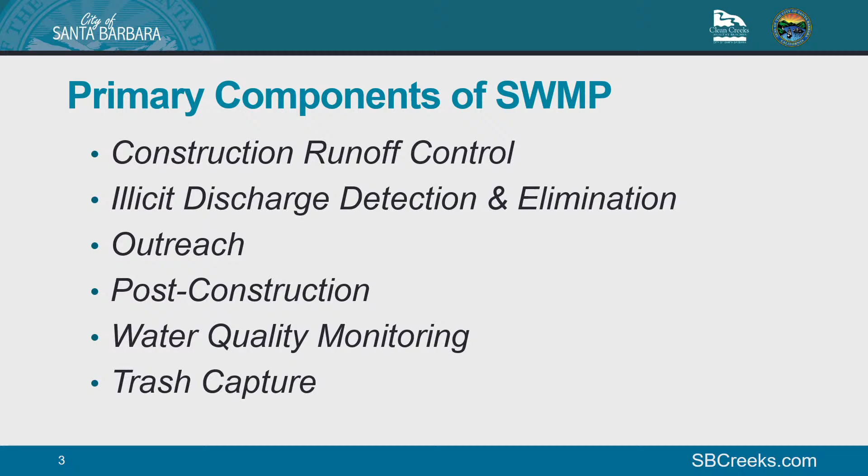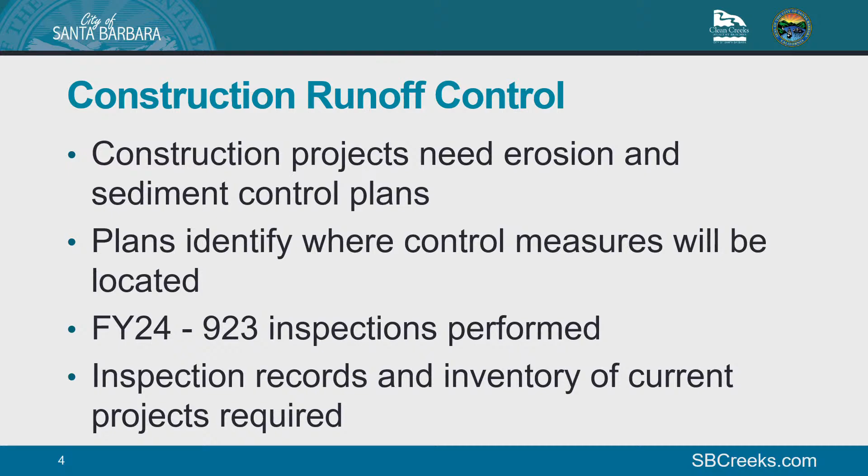First, construction runoff control. That's primarily the purview of the city's Building and Safety Division. It involves construction projects needing erosion and sediment control plans before they can have an issued building permit. Depending on how much grading is proposed, you might need a simple plan or a more extensive plan, but these plans just identify where erosion and sediment controls will be installed on site. Last fiscal year, our building inspectors went to 923 different sites to perform inspections to make sure these measures were installed properly. The city's also required to keep inspection records and a running inventory of all construction projects that have these erosion and sediment control plans.

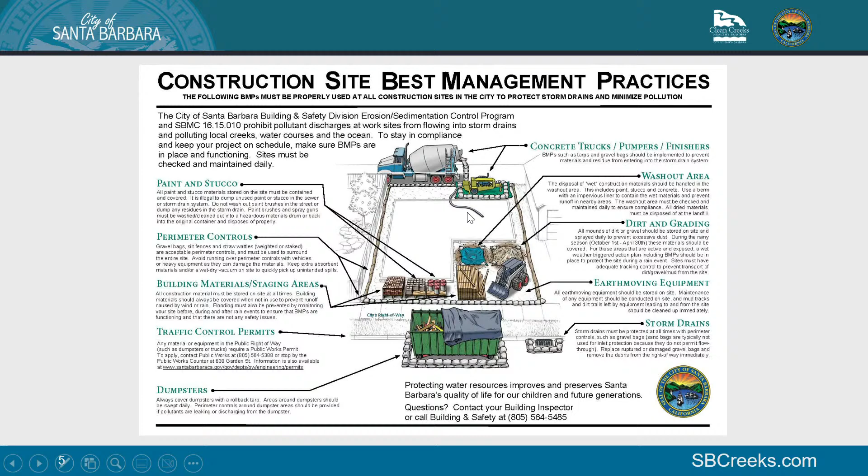The next component of our program is illicit discharge detection and elimination. The city has 3 dedicated code enforcement officers available to respond to any illicit discharge reports that come in. The requirement is that once we receive one of these reports, we respond within 24 business hours.

Staff also train the city field staff each year to make sure they know what an illicit discharge is and how to prevent that in the course of what they do out in the field. Last fiscal year, we had 105 illicit discharge reports, and all of those were responded to within 24 business hours.

We also have the ability to remove trash from the city's creeks and beaches. So there's illicit discharges, but there's also cleaning up these illicit discharges. When staff find trash on the creek or on the beach, we have a contractor that can come out immediately and clean up whatever they find. Last fiscal year, and in most years, we clean up around 100,000 pounds of trash. That's just on average what we find.

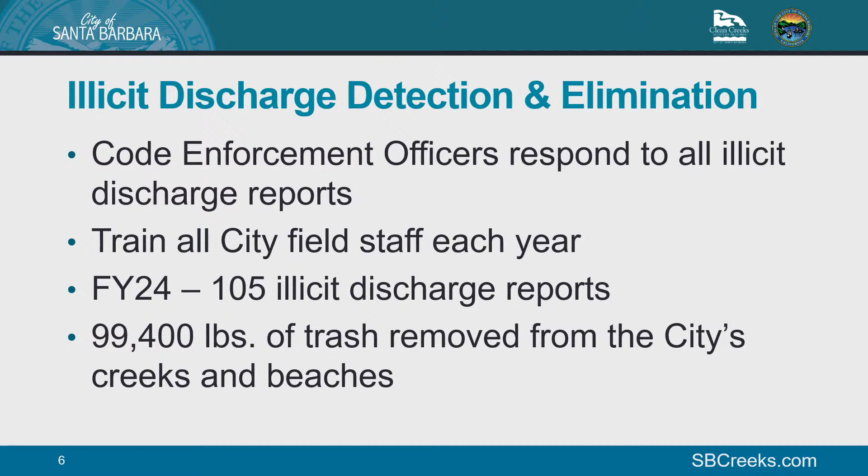The next component of our program is outreach. We have several dedicated outreach coordinators within our department that implement education and outreach related to improving creek and ocean water quality. This includes giving presentations in schools, coordinating volunteer opportunities like beach and creek cleanups. It also includes hosting Creek Week events every year that include restoration site tours and events at the creek, including the very popular Land Shark tour every year. If you haven't gone on that, I encourage you all to give that a try.

We're also continuing to promote the TikTok-inspired 'We're All the Solution to Water Pollution.' They're continuing to run ads, I see them pretty frequently, and when I hear the song, it gets stuck in my head.

So there's a couple new items that our outreach folks are focusing on. We have promotion of the new stormwater rebate program, which Aaron Markey is going to talk about next. We also have an urban creek trails program that launched during Creek Week last year.

This is just a self-guided tour of Lower Mission Creek and the lagoon, where you can go online and check it out, even from your phone, and it'll have things of interest, like native plants and trees, several spots where you can see how stormwater is captured and treated with permeable pavement and downspouts directed to landscaping, and also some creek restoration.

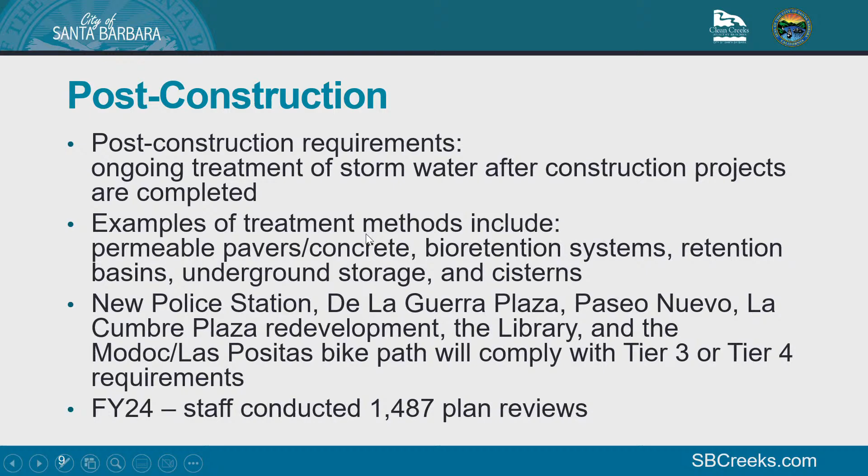Last fiscal year, Creeks Division staff performed 1,487 different plan reviews for compliance with post-construction. Next, I just wanted to give some examples of how applicants are complying with post-construction requirements. We'll run through a few of these.

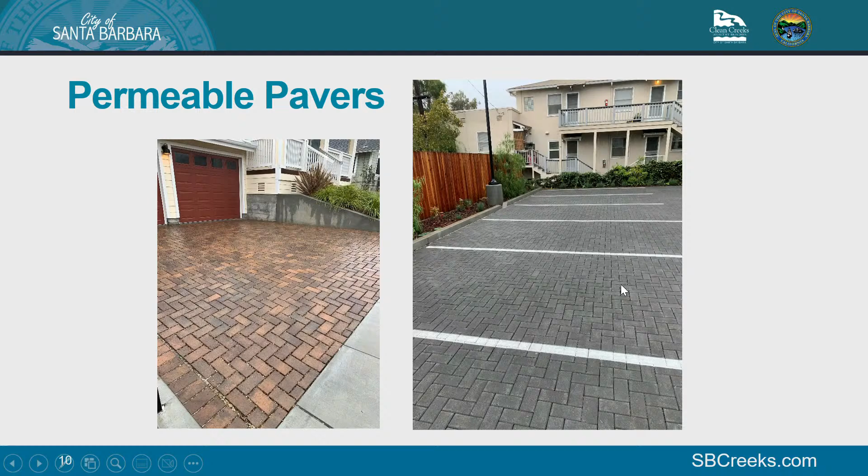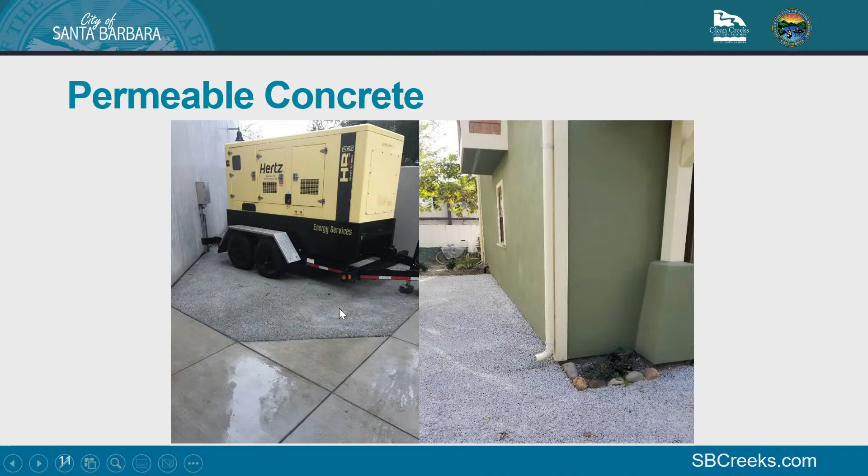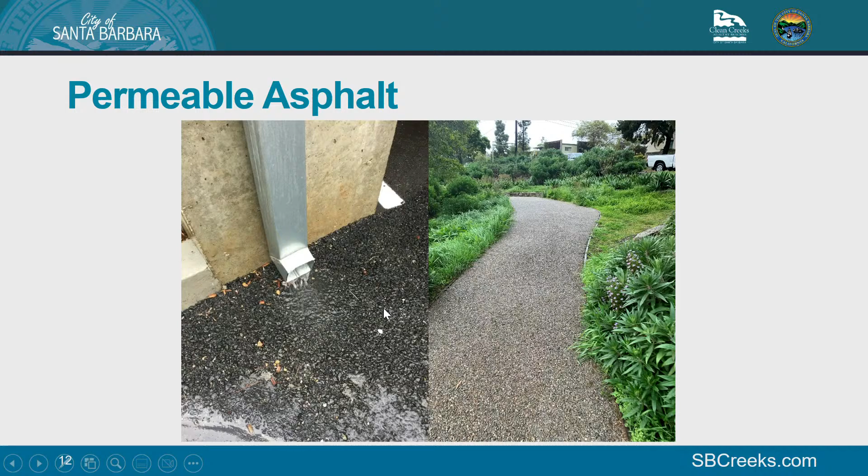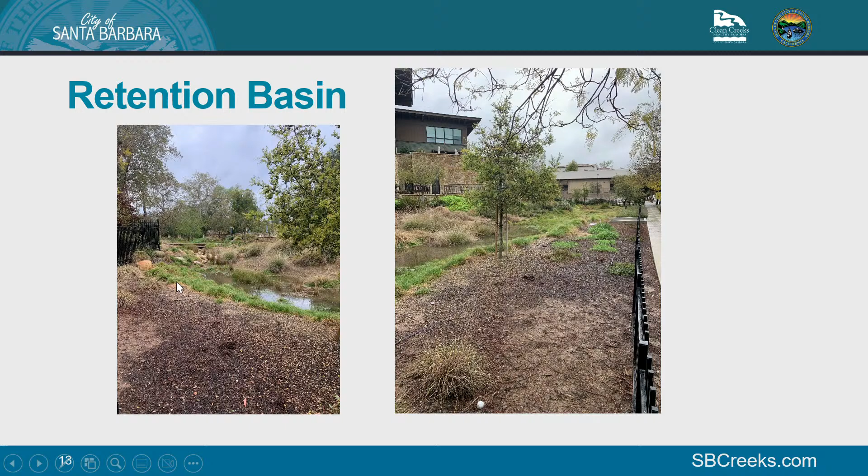Retention basins are another great method of compliance. We don't see a lot of this because, as you can see, it takes quite a bit of space, and most people, when they want to develop their parcel, want to use that space for development and don't want to dedicate it to a pond or retention basin. But occasionally we do see these in town, and they're cost effective - great for habitat, and very cost effective.

Bioretention planters are something we see with a very built out environment. Kind of the downside is you don't get a lot of capacity. The roof runoff flows into the bioretention planter, then there's a ponding area, and it percolates down through the media layers - the soil and the gravel - and then down into the ground.

Underground storage chambers - we see a ton of these. This is one of the most common things we see, because of how flexible these installations can be. This is Bohnett Park, an installation the city did a few years ago, and then they installed a field over the top of it. These are basically buried hollow chambers with a pipe connected, so water can flow in underground, then they fill gravel all around it, and you can cover it over with whatever surface you like. We did grass at Bohnett Park, but they're very popular with built-out parcels or where you want to build lot line to lot line. I've even seen these proposed under a building or under a parking garage.

There is a concern with maintenance - out of sight, out of mind. So we do require that there is some method of accessing these chambers to vactor out and suction out the sediment.

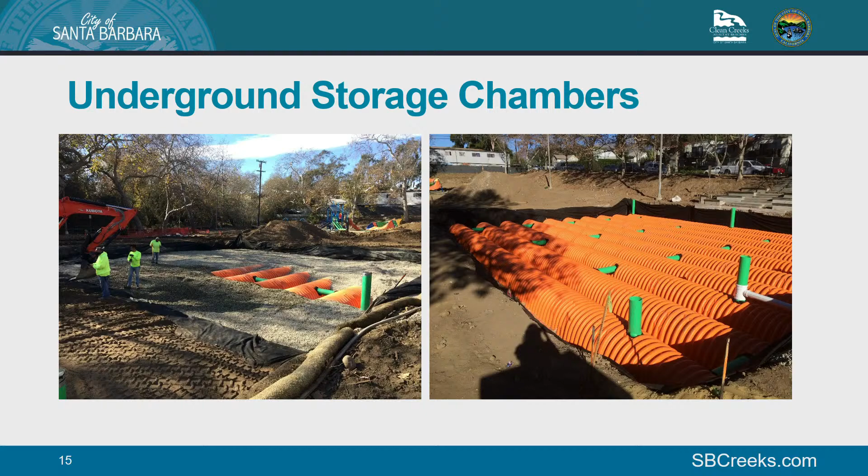Cisterns are another very popular method of compliance, especially on sites with soils that don't infiltrate very well, or on a steep hillside, or just where the property owner wants to utilize the water instead of infiltrating it deep underground - they want to spread it around their lawn or irrigate their plants with it.

The next component we'll talk about is water quality monitoring. We have a dedicated water quality monitoring coordinator, or we will, I should say - we're interviewing for that position tomorrow. This was Jill Murray's former position, but we'll be rehiring for this.

Each year, the water quality monitoring coordinator prepares a research and monitoring plan, which includes things like dry weather sampling of outfalls. All the pipes into the creek should not be flowing during dry weather, unless there's some type of groundwater intrusion. We want to make sure there's no illicit discharges happening, so it's a great time to sample when it's 72 hours after it rains at least. We can take a look at these outfalls, and if we find anything flowing, we can try to figure out where it's coming from.

We're also looking at monitoring of impaired water bodies for bacteria and toxicity. Most of the creeks in town are considered impaired by the water board, and the hope is that with repeated testing for bacteria and toxicity, we can eventually demonstrate that they should not be listed as impaired water bodies anymore.

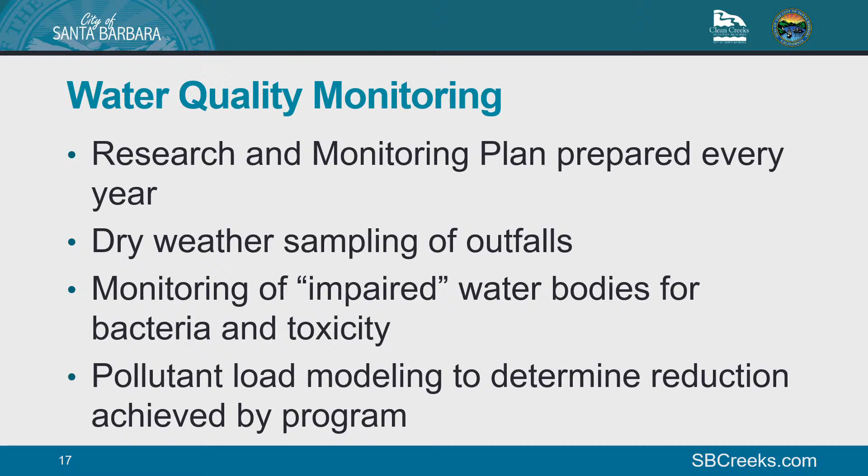Each year, we're also focused on pollutant load modeling to determine the reduction that our program has achieved so far. That's looking at some of the stormwater improvements we just talked about, to see that once more of those are installed on site, we'll have less pollutants coming off of those sites, and over time, as more parcels get redeveloped, there'll be less pollutants flowing off of those sites.

Here's just a few photos of staff out in the rain doing water sampling.

The last component of our program that we'll talk about is trash capture. It's a relatively new permit component. It actually hasn't officially been in our permit yet. We're waiting on a new permit to be issued, I'll talk more about that in a second. But we're required to fully implement these requirements by 2030.

What this is going to entail is in certain priority areas like bus stops, commercial areas, industrial areas, mixed use, and high density residential land use areas, we'll have to figure out a way to prevent trash 5 millimeters and greater from entering into our storm drain system and migrating downstream. That 5 millimeter diameter is about the diameter of a cigarette butt. That's kind of what they're targeting. Anything larger than the cigarette butt, they want to keep out of the storm drain.

So we currently have storm drain screens on most of our storm drains in town. However, those were installed 15 years ago or so, before this requirement, and those were not designed for a 5 millimeter, or cigarette butt, diameter. So those will not help us comply. So what are we going to do instead?

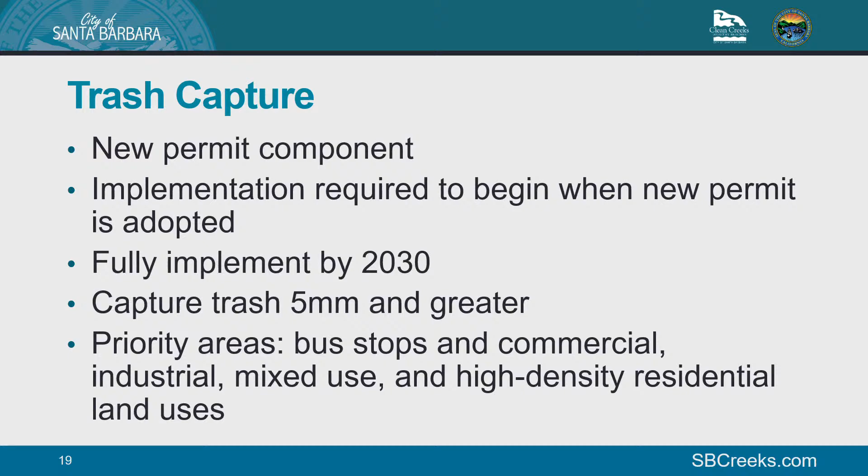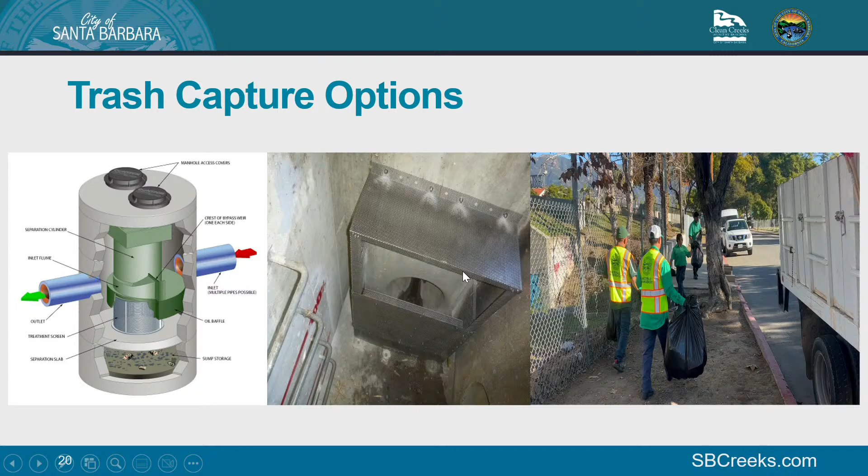But what we're hoping to do instead is to demonstrate that through street sweeping and through repeated trash cleanups with staff and contractors, we can reduce that amount of trash in high-trash areas to a negligible level, so we don't need to install these stormwater controls. That's our hope, and we're still working on that. Once we have a proposal, we'll go to the water board and try to convince them that our plan is okay instead of installing these structural measures.

So I mentioned our annual report. Each year we submit one of these to the state through their website. Creeks Division is responsible for compiling all the summaries we receive from city staff. I mentioned over 200 measurable goals that we report on. Each year in October we submit that report. Last October we submitted our report, this October we'll submit another. It's due on October 15th. We're currently in year 12 of the permit that was issued in 2013.

It seems like every year when I give this presentation, I say we're going to get a new permit any day now, or this year. We're in year 12 of what was supposed to be a 5-year permit, so we're still waiting. But we have received an initial draft of that new permit, last September. It was an informal draft. The next draft, the formal draft, is scheduled for this spring or summer, so we'll see if that happens. The latest estimate is for adoption of this new permit late this year, so late 2025. If that happens, then the beginning of our next fiscal year, fiscal year 2027, would be when the permit takes effect, so July 1st, 2026.

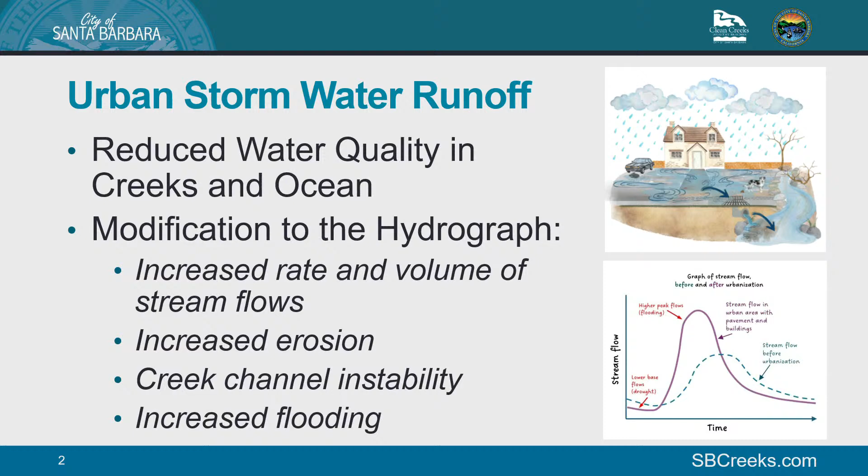Really trying to look at stormwater as a resource, and how do we manage stormwater as a resource instead? That's through, in our built environment, allowing things to infiltrate into the ground, providing more permeable surfaces—permeable hardscape, landscaping, green roofs—things that allow water to soak into the site, be retained, and slow that runoff curve, more mimicking the natural environment pre-development. This reduces flooding, reduces the erosional problems we're seeing in our creeks, and as water soaks through the soil, you get water treatment before it soaks into the groundwater and into the base flows of our creeks. You can also get increased base flow in our creeks as another benefit.

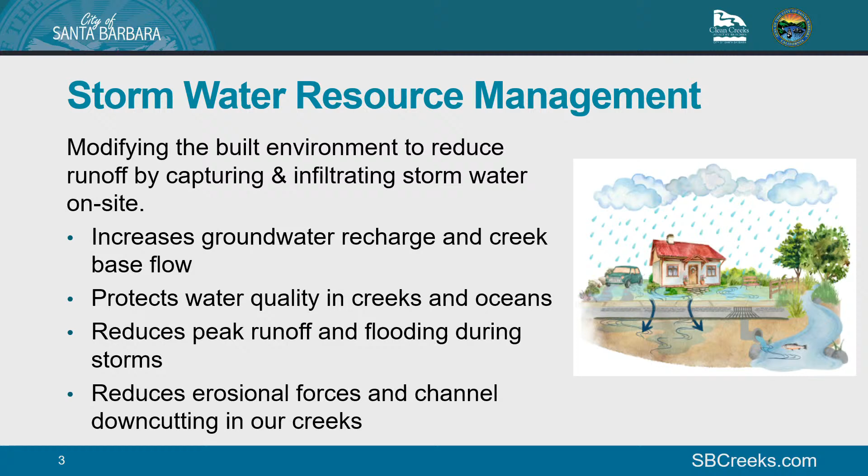So we've launched our stormwater rebate program just last week. We're looking at voluntary measures that property owners can install on their own properties to provide stormwater benefits. We've narrowed it down to these initial offerings at this point—kind of a pilot, launching it to see how much interest there is and how we might tweak it over time.

Disconnected downspouts essentially means if you have a downspout that's currently piped all the way to your curb and gutter—that's a piped downspout. If you disconnect that and let your roof downspout run to landscaping instead, you'd be eligible for a $250 rebate per project.

There's also a rain barrel rebate. Rain barrels are usually installed at a downspout and can range in size. We're limiting ours between 50 and 200 gallons—anything over that is really more of a cistern and might require structural stability analysis because of weight. You can get up to $200 per barrel, and this is on a reimbursable basis.

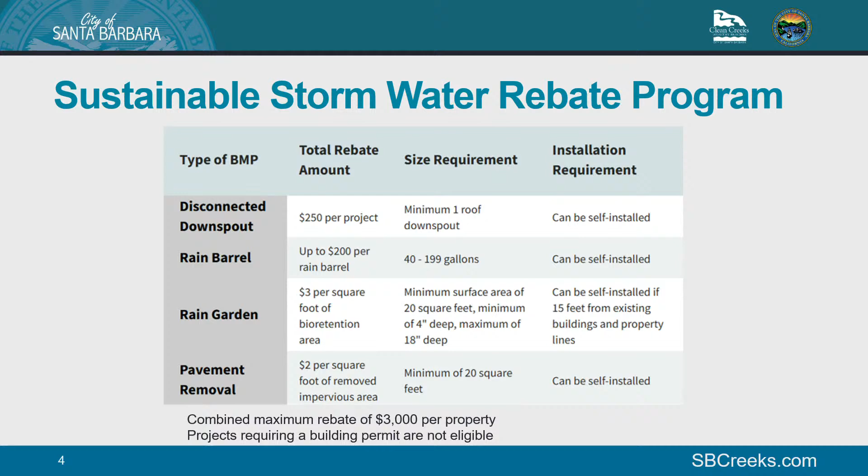I'm going to click through ahead. There's information in this table, which is on our website, and I've got pictures of each of these as well. Here are some examples of disconnected downspouts—you can do rain chains, or just cut off the downspout and let it run into the landscaping right at the edge of the structure. Some people pipe it a few feet away and put down cobble or rocks to dissipate the flow. There are a lot of different options for what that might look like.

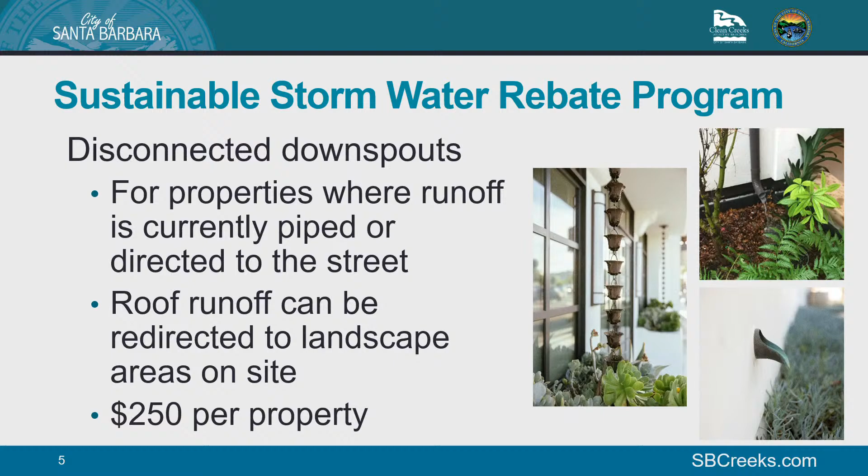And then rain barrels—again, so much variability in these. We looked at possibly bulk purchasing rain barrels and giving them out for free, but ultimately decided to let people choose what worked for their site, since there's so much aesthetic variability, let alone shape and sizes—you can get rectangular ones that fit nicely up under your eaves. We opted for this route to give flexibility for what works best for someone's site. Years ago there was a program using recycled wine barrels—such a great program—and we've talked about bringing that back. Someone actually asked me about it today; I'm not sure if anyone's still making those, but we're going to do some research. These can be recycled wine barrels, plastic ones purchased from Home Depot, corrugated metal—there's such a variety of options.

The intent is you're capturing runoff from your roof and storing it, attenuating and slowing that water down. You'll use that water on your landscaping, ideally through a hose bib at the bottom. That delays water running off your property—hopefully it's not running off at all, but used on your property instead—delaying or eliminating water from running into the street when it rains. This rebate is on a reimbursable basis, so the applicant would need to provide a receipt.

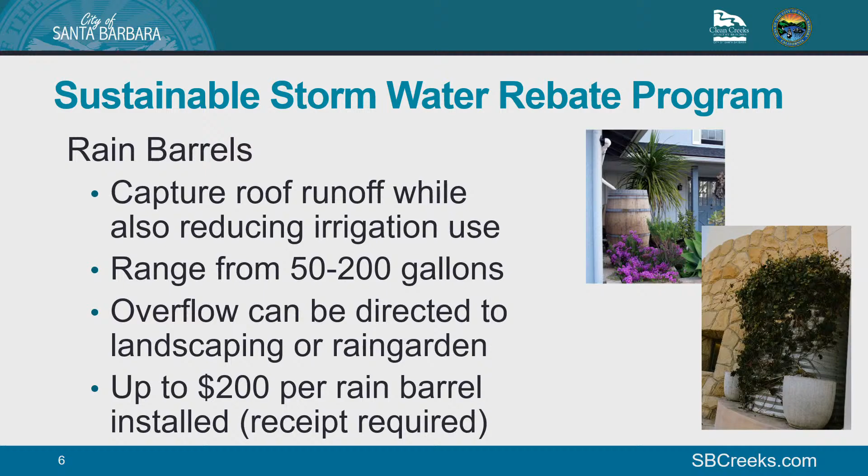And then rain gardens—these are shallow depressions in the landscape that allow water to pool up, sit, and infiltrate into the ground. We're giving a rebate of $3 per square foot of rain garden installed, based on the actual depression area. These could be like little river-type features through the landscape, or larger bioretention areas like a big pond. They need a minimum depth of 4 inches to qualify, up to 18 inches.

Additionally, we're working with water conservation to cross-promote, since these are stackable rebates. So if you have an existing lawn you're removing and want to turn into a rain garden, you'd be eligible for an additional amount per square foot—up to $5 per square foot if that case applies to you.

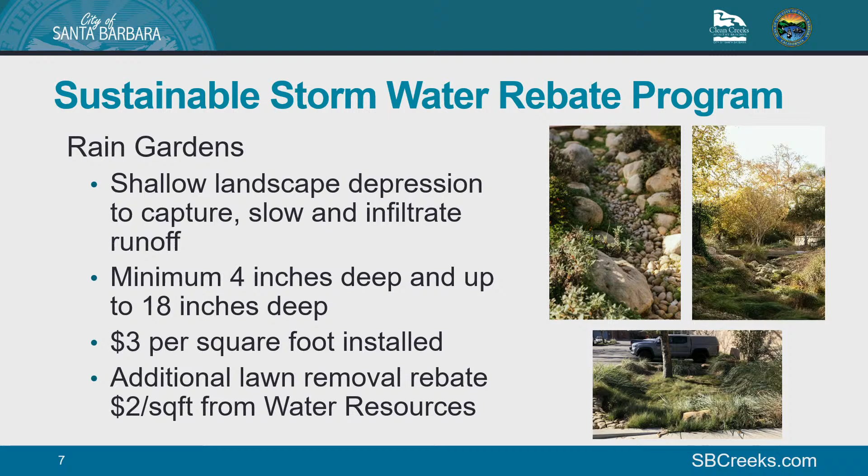And really any of these rebates, if you were looking at them, could be stacked. So you could do a disconnected downspout that goes to a rain barrel, and then the overflow from the rain barrel goes to a rain garden, and you could stack all of them.

And then the last one is removed hardscape. So this one has a number of caveats. We're looking at a minimum of 20 square feet to be eligible. It has to not be a driveway. A caveat of the program overall is that it not trigger a building permit, just to avoid confusion between a required stormwater project versus a voluntary one. So only measures that don't trigger a permit are eligible. Any work on a driveway requires a building permit.

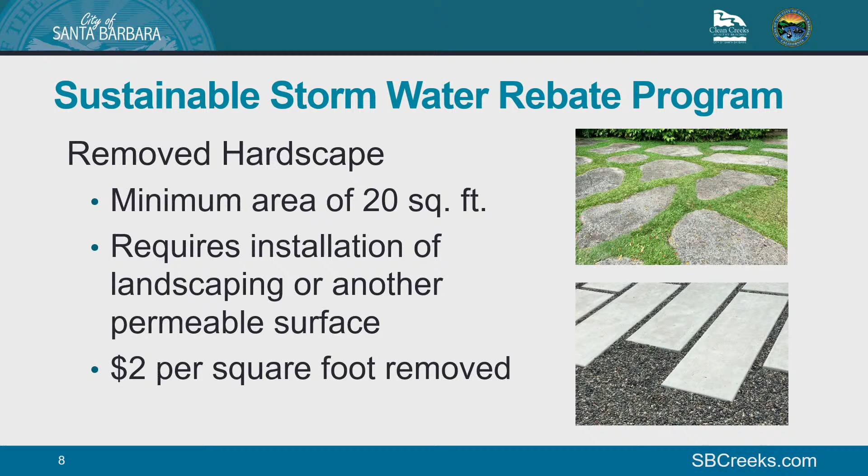So unfortunately, that's not going to be eligible for this rebate program at this time. But if you want to remove walkways or patios on a single family residence, completely eligible. They could be replaced with landscaping or with permeable alternatives. And that is $2 per square foot of hardscape removed.

So the process is there's an intake eligibility form on our website. That's kind of the initial starting point. If you're interested, you fill that out. Then we set up a site visit to confirm the feasibility and if you're eligible for what's proposed.

Essentially, are your downspouts already disconnected? Then sorry, you're not eligible. Is there hardscape you're actually going to remove? We'll measure it, we'll kind of quantify it.

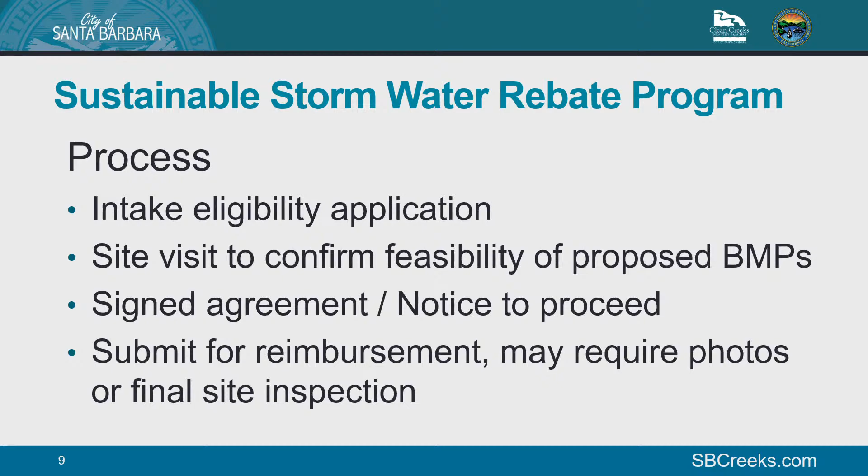And so then there's a little agreement form that we both sign at that site visit that basically outlines what's proposed, and the applicant or property owner agrees to some terms and conditions as part of that. And then once they've completed it—which we've just launched, so we've had a number of applicants and site visits already, but no one's completed it yet—they'll submit for reimbursement with some additional photos of the completed work, and a final site inspection might be required in some situations.

So we're currently, just launched it last week. We're outreaching about it in all the different city newsletters. So Water Resources shared something about it. We shared it in our department newsletter. It was in the City News in Brief on Monday. I think we'll do another piece on it next week. Social media, we're going to do a city TV segment about it. And then outreach events, so like at Earth Day, we'll have lots of information about it and try to promote the program there.

And so far, yeah, we've had 11 applicants and we've done like 5 site visits already. So we'll see if it just keeps getting interest or if that's kind of the initial push. We're still feeling it out. So we hope that the interest continues.

And that's it, if anybody has questions. Thanks so much, Erin. Really exciting. I'll hold my questions and comments till later, but Lee.

Well, I can vouch for the fact that Erin is doing site visits because I was walking by a house the other day in my neighborhood, because all I do is walk dogs all day, and there she was with one of my neighbors doing, I think it was the first one, you said it was the first one, yeah, so pretty cool. Some feedback for you.

In my other life, I'm the captain of a newly emerging Firewise community. And one of the things that the state is going to increasingly be pushing is a zone 0, where there's really nothing flammable within 5 feet of a structure. So those beautiful wine barrel rainwater catchment things, no, because they're wood. So I would encourage you to discourage people from either landscaping or things like rainwater catchment that are made of any kind of flammable materials. The state is going to be increasingly enforcing this, certainly for new construction, and insurance companies are increasingly pushing people to remove any landscaping from within 5 feet of their house as well. But there's lots of other options.